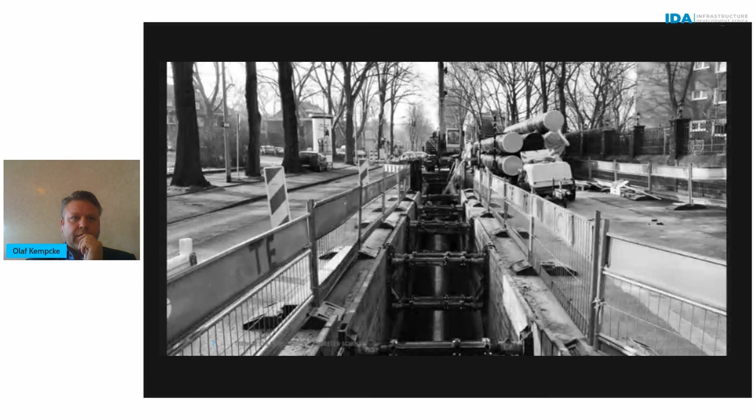Here you can see what normally happens if you have to place a new pipe. This is a traditional way to install pipelines and cables, and you see you will disturb the traffic, you will disturb the people, and you will disturb the environment. This is what we normally don't like to see, because this will harm all the participants in the environment within the cities. We know now in Africa, even the large cities have very huge problems with an increase of traffic, and if you open just one street, you will have a lot of problems with this traffic.

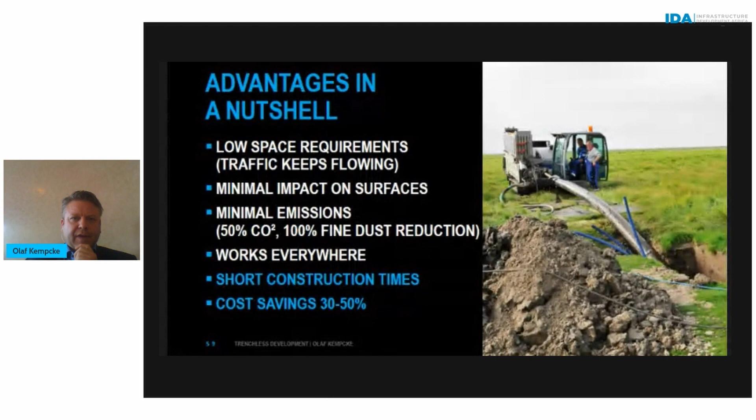Therefore, we are providing trenchless technologies. This means we can put all the things down in the ground without opening the ground. We have minimal impact on the surface, and with trenchless solutions we help reduce costs. We have minimal impact on emissions, and we can work with these solutions everywhere, even in hard grounds, even in rocks—there are machines which can place pipes in rocks. You shorten your construction time, and finally get cost savings between 30 and 50% compared to the traditional way of installation.

And you can do this for all kinds of installations with the machines. There are fiber optic networks which can be installed, e-mobility—of course this is more sophisticated maybe for the Europe, UK, US market—but even gas networks, pipelines, and district heating, water pipelines, sewer pipelines, and also the renewal of existing pipelines.

This is a big problem which we can see now with our clients in different African countries, because all the water and drinking water pipelines were constructed many years ago—sometimes from colonial times—where the diameter was very small. Now the city is growing very much, and you have problems providing sufficient water, and even bringing out all the wastewater from the different parts of the city, because the diameter of the pipes is very small. Therefore we are providing solutions.

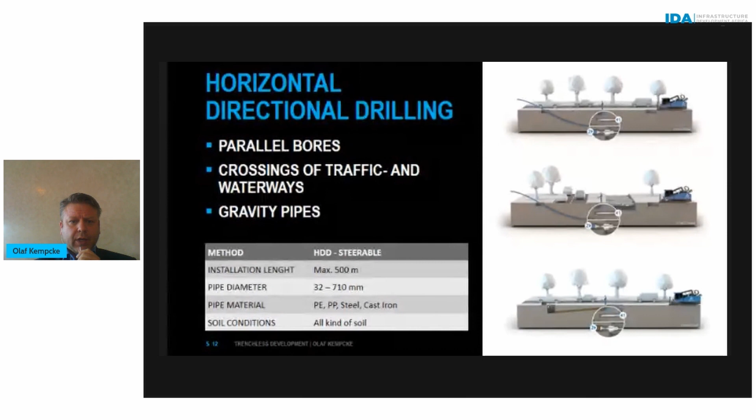Here you can see a horizontal drilling machine where you can cross streets, where you can cross rivers, without opening the ground, so the traffic is constantly working. With these machines you can install pipes up to 710 millimeters, and as I said before, the installation length can be up to 500 meters with one bore. We can work with these machines in all kinds of grounds, and the piping material can be nearly any kind of material, like PE, PP, steel, or cast iron.

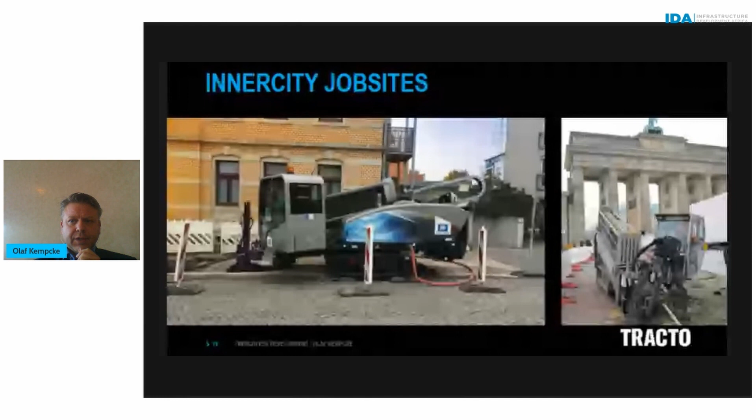These are pictures of the drilling machines, the steering drilling machines, and two inner-city job site pictures—this is from Germany. We have other examples where we worked in different countries, like here in Morocco, of course in Tunisia, as well as in Senegal. So we have had several clients who use this technology already.

Here you have a very small steering machine. You need just a small pit, which is 1 meter 50 by 1 meter 50, and you can work with this machine inside the city without stopping the traffic. You have a short setup time for this—fast. The most important point is that all local companies which are doing installation of pipes and cables can learn to handle this machine very fast. So even though it's complicated technology, it can help bring out new pipes and new cables in a very short time.

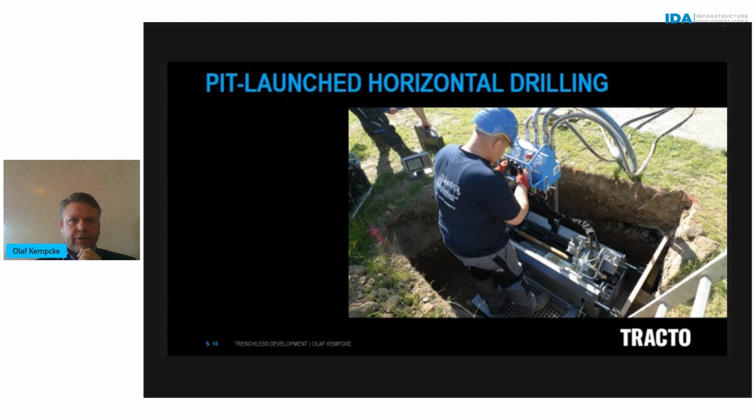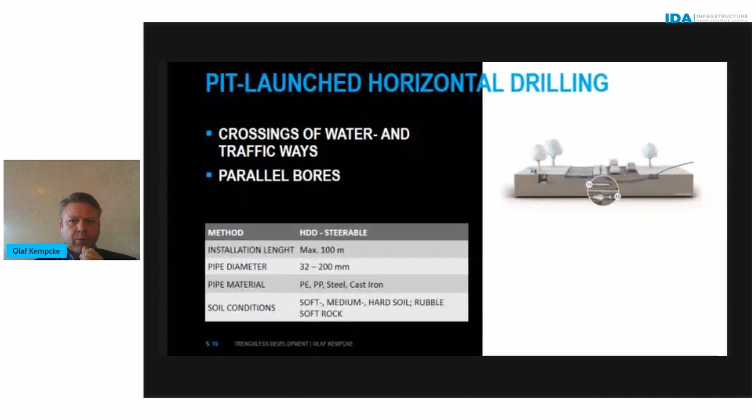Here you can see just an example. Even with this small unit, you can do bore lengths up to 100 meters, and it's steerable, so you can decide how deep you like to go, under the river, under the street. You just need a small pit of 1 meter 50 by 1 meter 50.

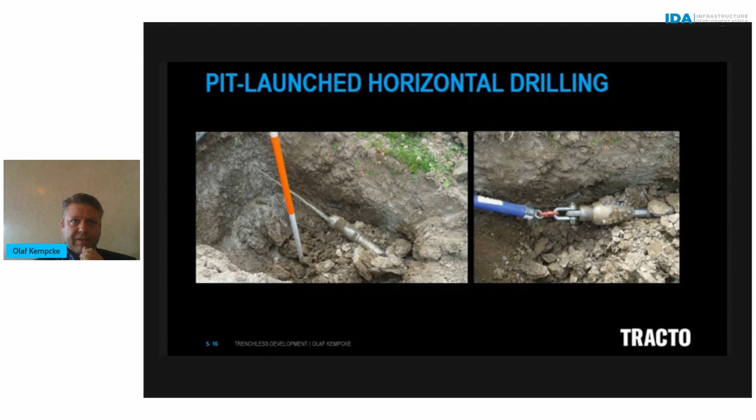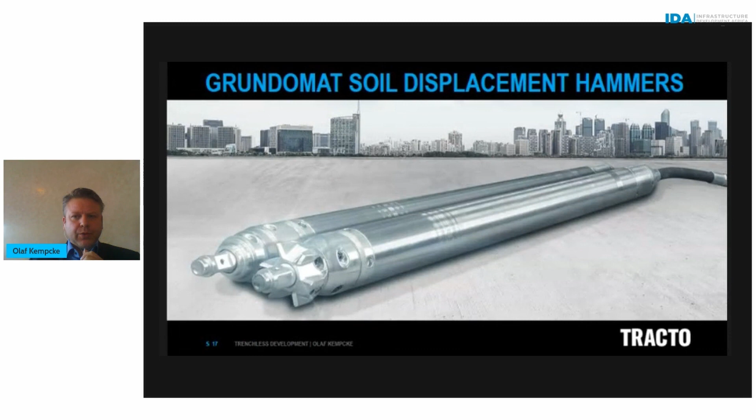All the clients we have are using this for short connections, up to 20 meters. With this short connection soil displacement hammer, you can go under the streets. For example, in Senegal, we have authorities which are not allowing the street to be opened. Even if it's just a small street in rural areas, they're using this soil displacement hammer to place small pipes, up to 160, up to 180 millimeter.

It depends, of course, on the soil conditions. But just to give you an idea, to place a pipe of 110 millimeter with a distance of 15 meters, you need at least 2 or 3 hours, and then the pipe is placed without opening the street.

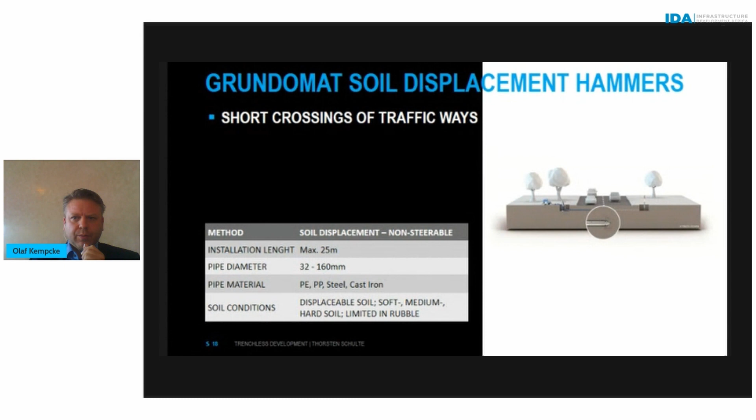Here you can see how it works. You just start in a small pit, cross the street, and your pipe is placed. You can do up to 3 or 4 pipes per day if everything is well prepared.

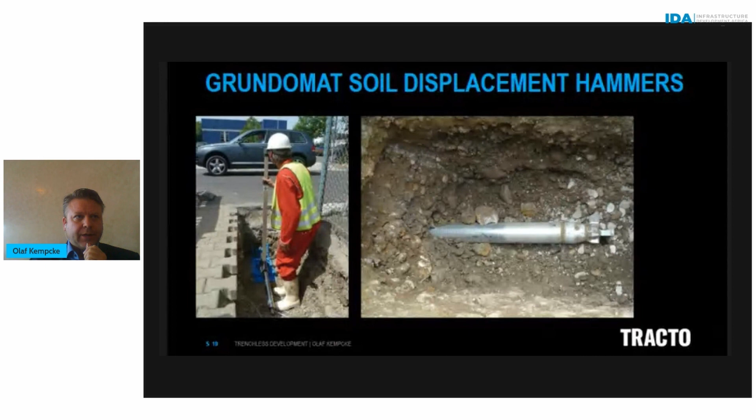Now it comes to the so-called Grundoram steel pipe ramming. This is used for placing steel pipes, starting from very small diameters of 200 millimeters up to 4,000 millimeter.

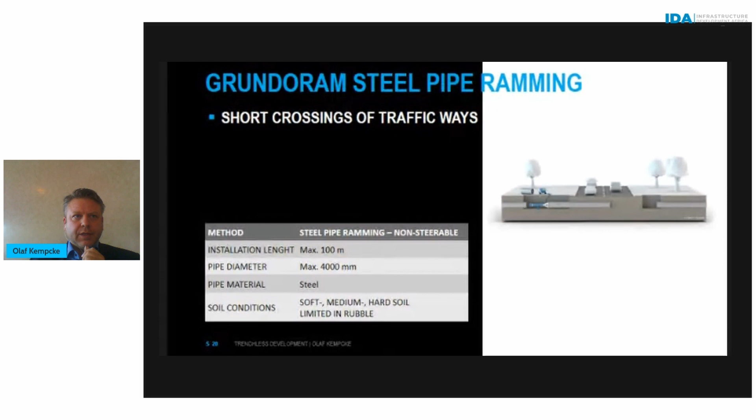The advantage of this is that you can use it, for example, to place pipes under the railroad, and this is not harming the installation of the railway, because the only thing penetrating the ground is the steel pipe.

Just to give an example, to install a pipe of 600 millimeter for crossing such a railroad way, you need at least 3 to 4 hours. Of course it depends on the ground conditions, but it's a very fast way to install the steel pipe, and it's very secure, because even tests and approvals have shown that the railroad is not impacted by placing the pipe.

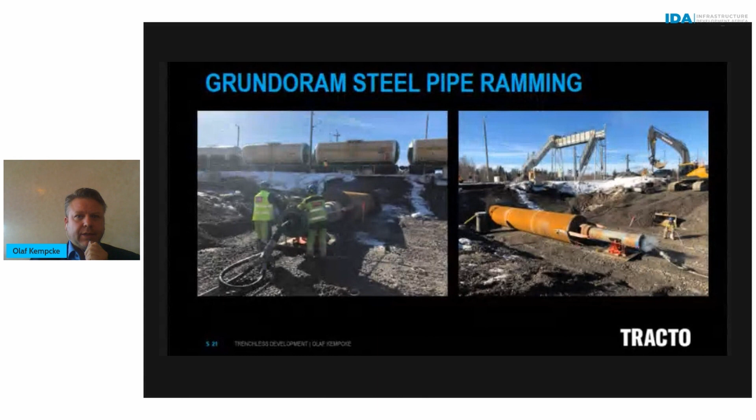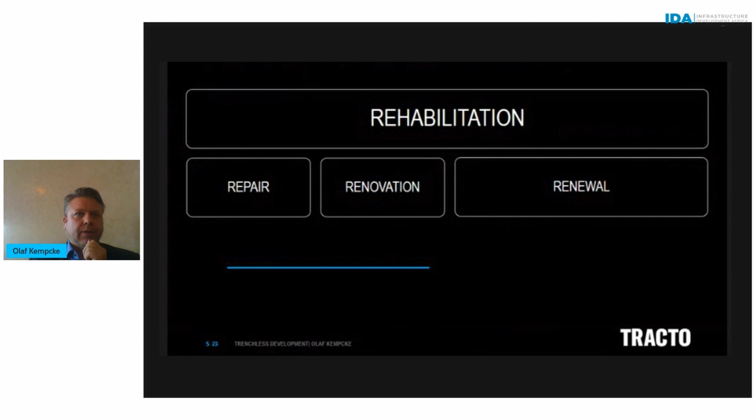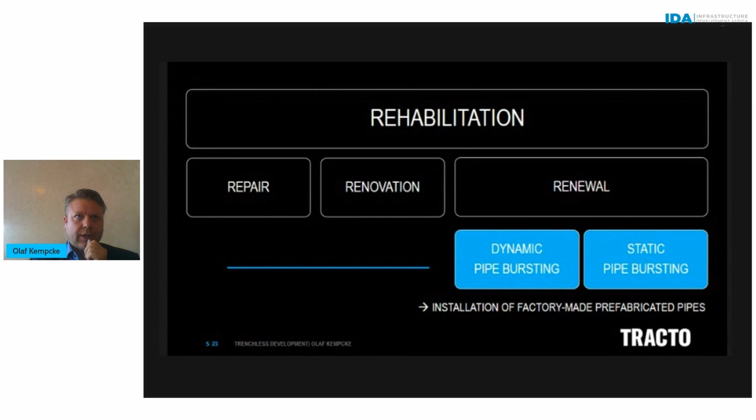Now it comes to the renewal of existing pipelines. There we have another technology, and we're going with several technologies. In this case, we're using the unit called Grundoburst. With this unit, we can repair or renovate old pipelines, or do complete renewal of water and wastewater pipelines, so there are several possibilities.

You're using this Grundoburst machine, starting with a small pit, and you go into the old pipe. Crushing with this machine, you're crushing the old pipe, and at the same time you're installing the new pipe, which means you can do up to 300 meters per day without opening the ground.

You just do a survey in advance, doing it with a camera. You're checking everything, if there are damages which might be in the way and will block it. Once you've done this, you can install the new pipe easily, and it goes along the old pipe.

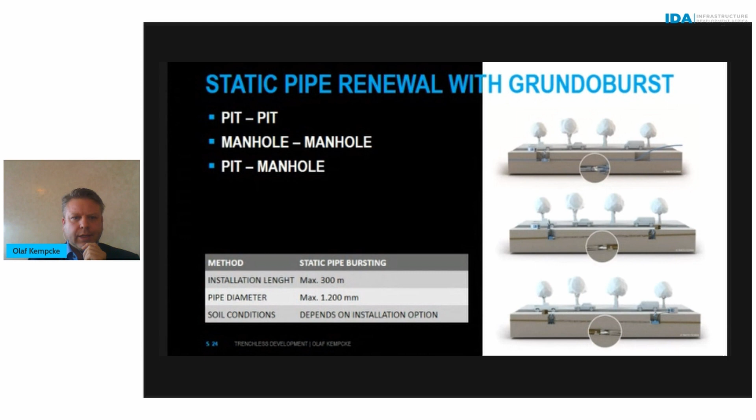So it means, for example, if the old pipe is 110 millimeter, then you can install a new pipe up to one size bigger. This helps dramatically to provide new pipelines in a short time, and the installation can be done up to 1200 millimeter.

As you can see in the pictures, the preparation is not so complicated. You always just work with a starting pit. You place the starting pit, and you build a good thrust bearing with sheet piles and a concrete wall to stabilize the machine.

Then you attack the existing pipe, and you will see that you have a new pipe within one day, you have 200 meters, 300 meters of new pipes.

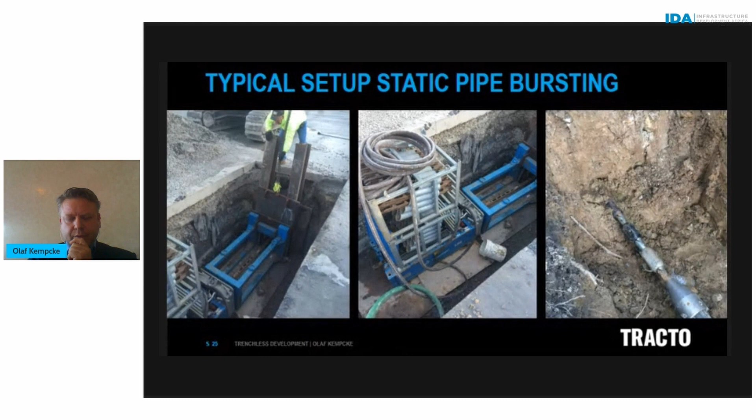Even if you have house connections along this way, it can be done easily. You just do a bypass, and after you place the new pipe, the bypass will be connected to the existing pipe, or to the newly installed pipe, so the house connections keep working without interrupting water for all the people in the area where the new installation is done.

As I said, you can do the installation of pipes with the same diameter, a larger diameter, or even a smaller diameter, because we know that PEHD, the fluid flow inside compared to a steel pipe or old beton, is more fluent. The water runs much better in this PEHD pipe than in other pipes.

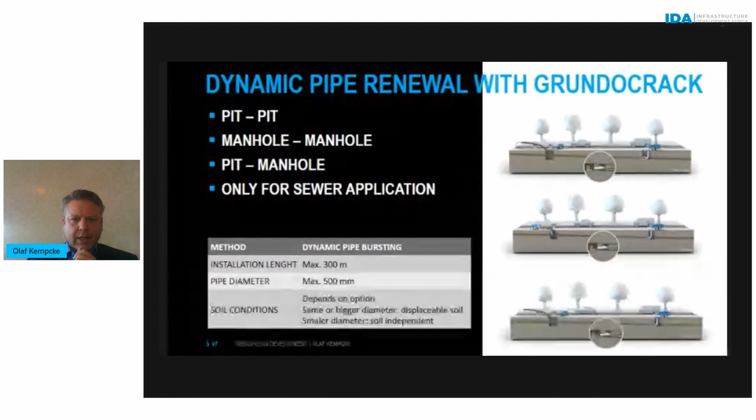With this dynamic pipe renewal, with another machine, which is Grundocrack, you can place also a new pipe. You're just cracking the old pipe, and it is up to 300 meters, but the pipe diameter should be less than 500 millimeters. So Grundoburst and Grundocrack are the two solutions for placing new pipes. Here you can see a model of this machine. You're pulling the machine through the old pipe, and you're placing at the same time the new pipe.

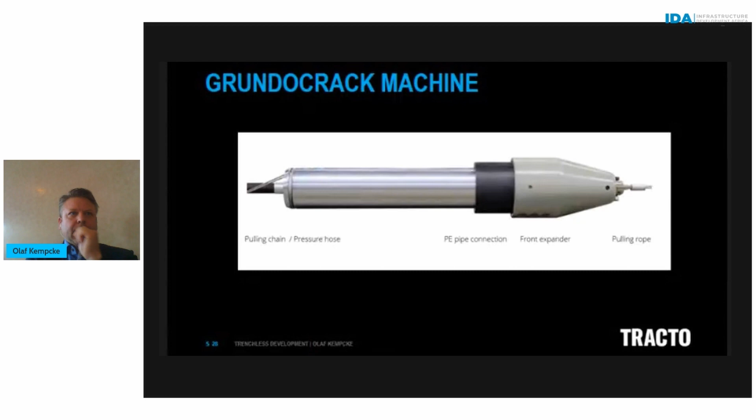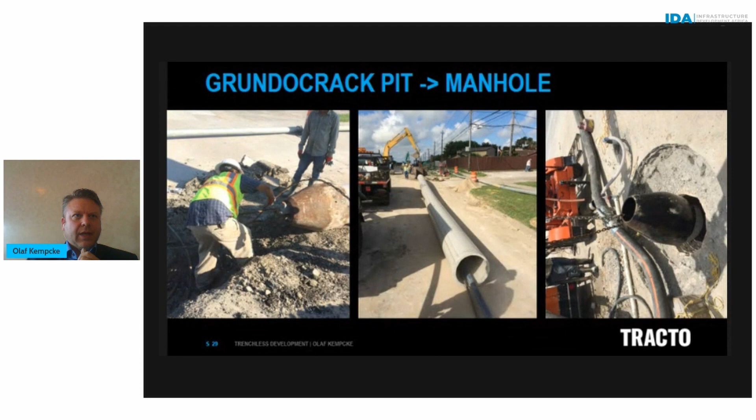So here are some pictures. The new pipe will be installed within the ground, and you will not see it. This is one of the most problematic aspects, because nobody believes this will work, because nobody can see how it works. So you will place the pipe under the ground, not the traditional way, and even for household connections, these machines will work perfectly. With our experience in different parts of the world, we can see that.

Even to install all the cables, all the new pipes, all the protection pipes, the new infrastructure for energy, this is a big issue, because you have to invest a lot of money to place all these pipes, but you have to do it in a secure and environmental friendly way. So therefore our technologies which we provide in this case are very helpful.

What we are doing with our clients in Africa is that we train and educate even the authorities why they should use this technology, why it is helpful, and how it works. This is always our first step. We explain very well why this technology should be placed. We are not a construction company, a manufacturing company. We're not executing the work. We're just providing local partners, local authorities, the right solution so that they can use our machines to place the pipes, cables, and all that is needed for good infrastructure.

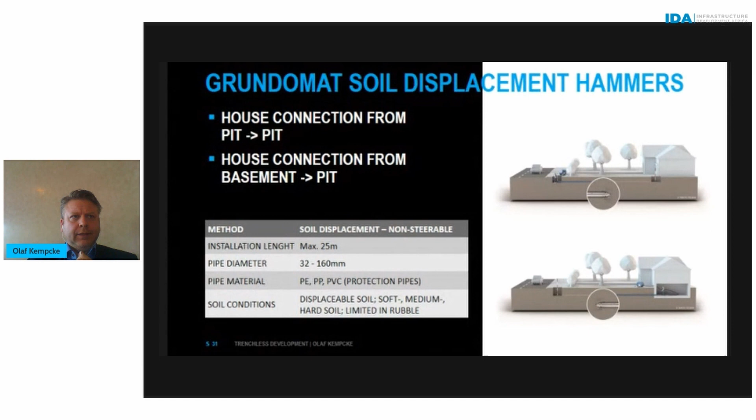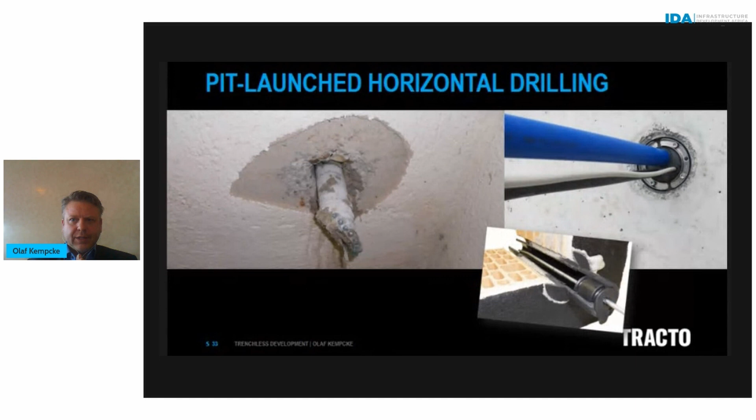I will go forward so you can see it. Even house connections can be done with the machines, directly from the street into the house. The drill head on the left side is arriving in the basement. This drill head can also be located, because there is a sonde inside which is constantly sending data to a receiver, where you can see how deep you are and which direction you go, proving that you're going in the right direction and not disturbing or damaging something.

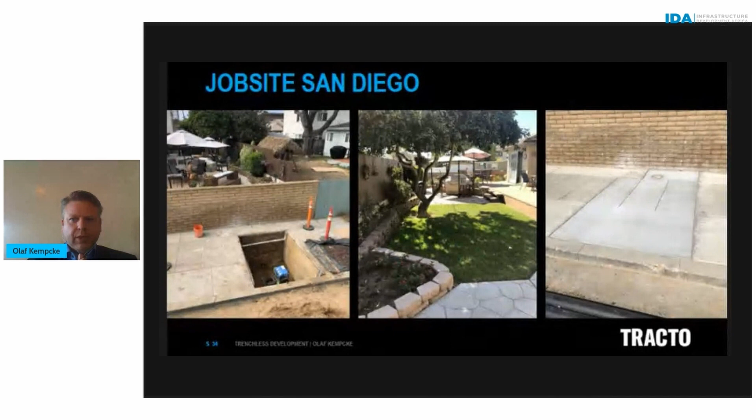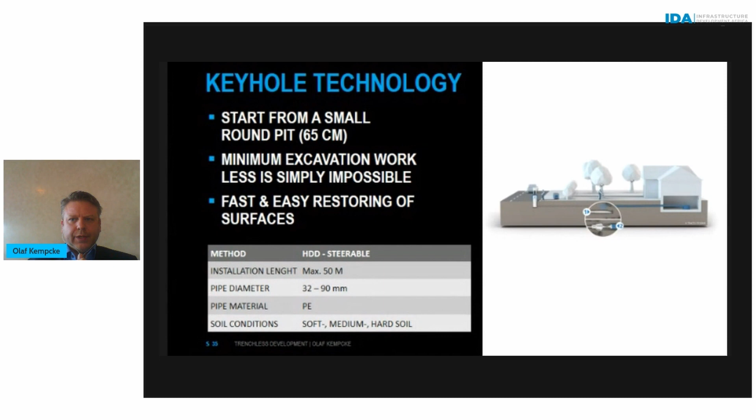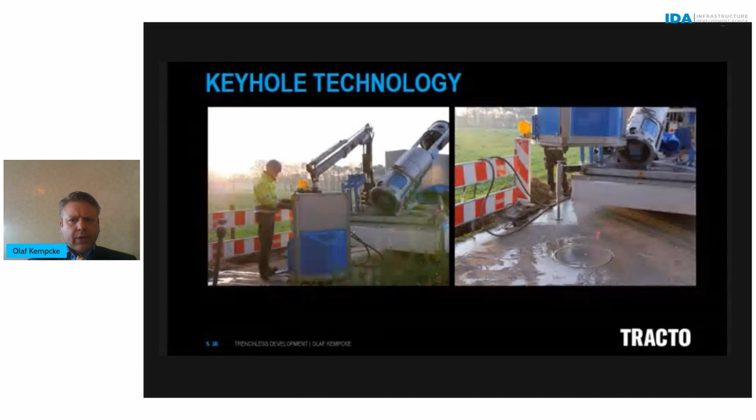So here you can see, if you'd like to go from the street just behind another house, you're crossing the whole ground of the site, and you're coming out on the other side, and nobody is harmed by this mini directional drill installation. There are so many different technologies in our case, and I will not bother you with all the solutions. The most important point is that you learn there is technology which can help you and your authorities to install all the new pipes, all the new cables, without harming traffic, without harming people.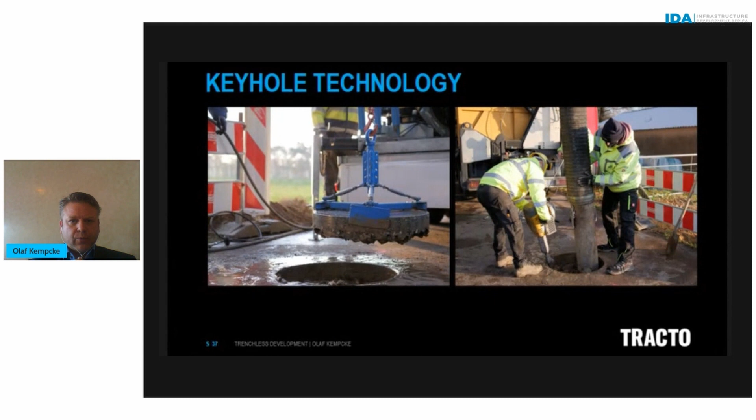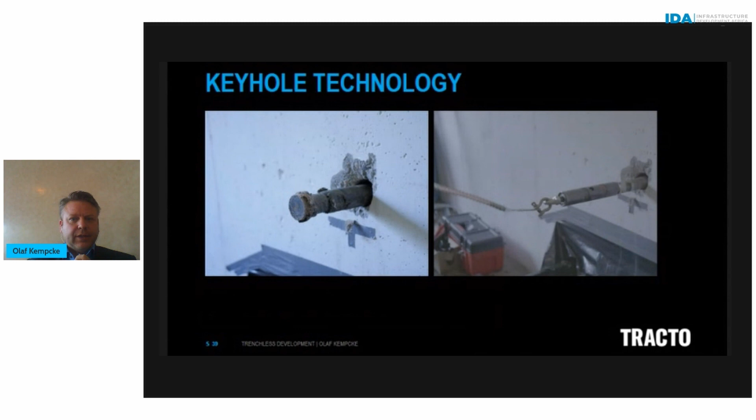In this case, for example, you just do a small hole in the ground, and you install a new pipe under the ground with the keyhole technology, which is very sophisticated, and even in larger applications, very good technology to use, because then, as you can see, you use just a small machine. I think the best way to learn more about this is to meet each other, to have a really good idea of what the technology can do.

Just to give you an idea, we have about 22,000 different combinations and settings just for pipe bursting. This is very interesting for all the authorities in countries which would like to increase their network availability, and even the pipeline or the installation should be done in a way that works well.

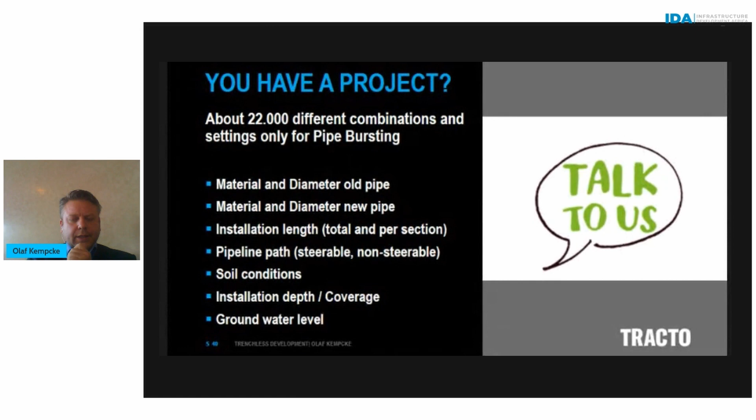For example, in Abidjan, the traffic is horrible. You can do installation of new water pipes without opening the ground, and you will do 1 to 200 meters in one day. This will help very much to provide more energy, more water supply for people who are maybe at the moment not really participating in these networks, and who don't have availability of the networks.

There are huge investments in various African countries, and we aim to participate in these infrastructure investments. This is a target, to see how we can help local people, even if it comes to tender documents, special applications, or experts. We have a kind of training school at our headquarters where people who work with the machines are trained, and we also provide training on the ground, with the machine, in the country. So not just to sell the machines, but to support all the people who are working with these machines and who would like to increase the availability of the network.

And this just leads me to a summary: the infrastructure of the future should be trenchless.